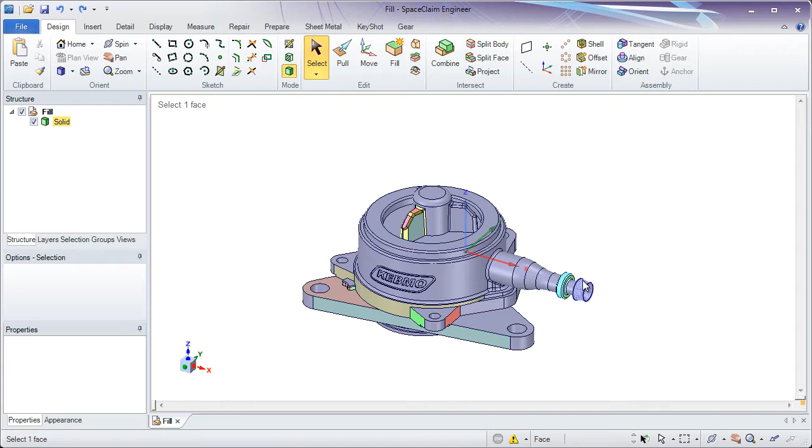Today we're going to be looking at how fill helps to remove geometry from a model. What it does is it removes the material that you have selected on the design. Let's zoom on to this piece here.

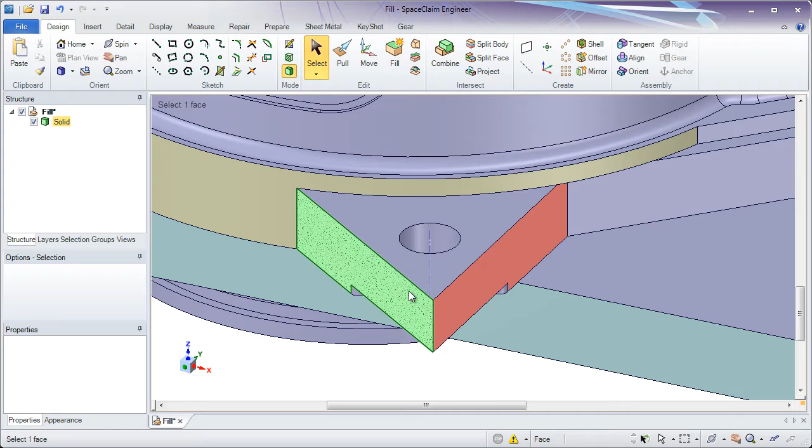You'll notice that what fill is meant to do is remove faces. Let's say I select on this round. If I click the fill tool, it removes what's selected, which is the round, and extends the remaining faces. So what I always think about is select what I want removed and don't select what I want to keep. Notice how the red face extends and the green face extends. This works for rounds, holes, and any faces that are on a part or a model.

Let's take a look at this hole for instance. Now, like we saw in Select and a few of the other tools so far, it's going to be important that we're selecting faces if we want to remove faces. Notice with this hole, if I select it and hit Fill, Fill removes that hole and extends the top face and the bottom face.

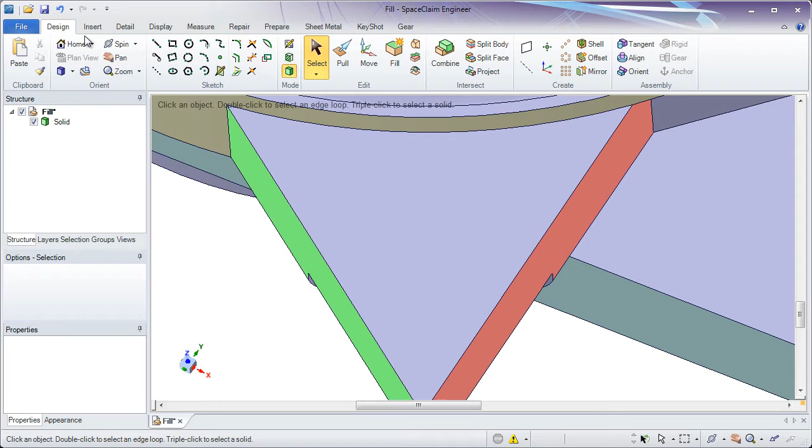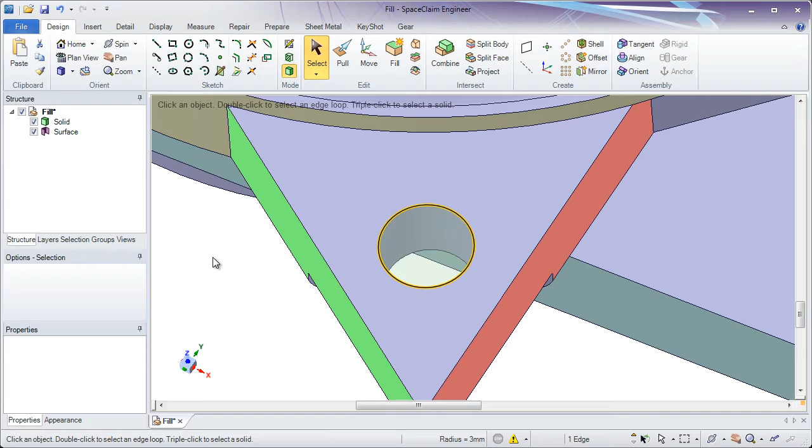If I undo, by hitting the Undo button in the Quick Access toolbar, let's say I select the edge of that. You'll notice if I click the Fill tool now, fill's not going to remove that hole, it's actually going to fill the area in between that edge and create a new surface. This is a nice technique if you wanted to change a through hole to a blind hole.

In this case we're going to undo, with Control Z or in the Quick Access toolbar, and we'll just click the hole and hit Fill to remove it.

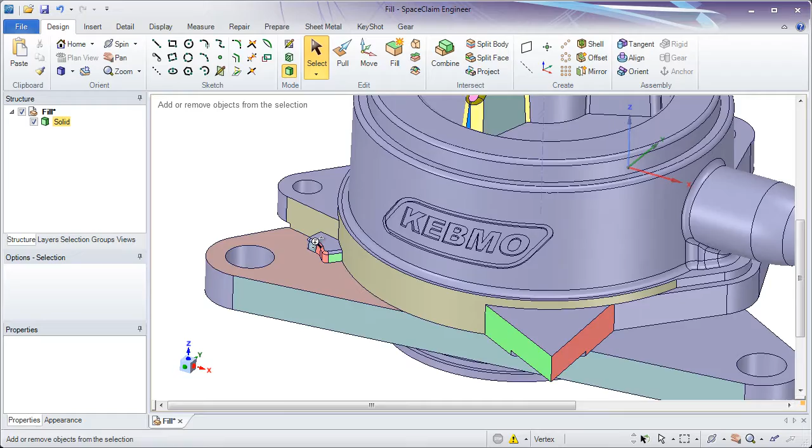Now, fill works with one face, but also with multiple faces selected at the same time. Let's zoom out and then zoom back in to the left side of the model. Remember, if you want to select chains of faces which are tangent, a fast way to do that is to double click. Notice this chamfer. If I double click, it selects that loop of faces. In the bottom right hand corner of my screen I have 7 faces selected.

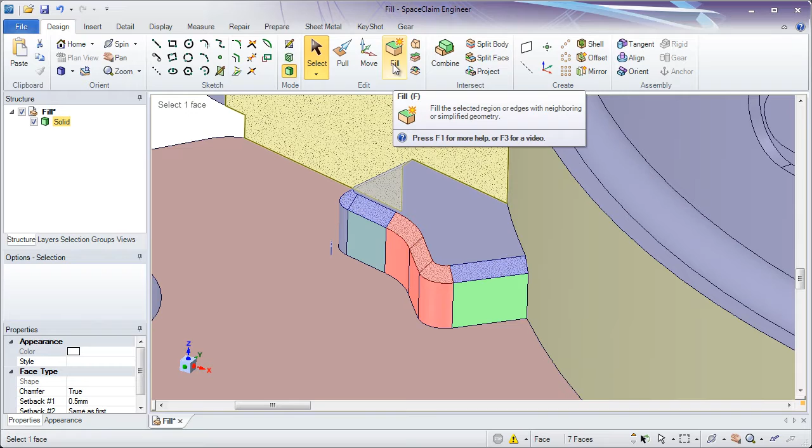With these faces selected, if I hit the fill tool, all of the faces selected are going to be removed, and the remaining faces are going to be kept. Notice the green face extends to the top, the red faces extend to the top, the blue face extends to the top. So whether you have one face selected or multiple faces selected, it will try to remove those faces and extend the remaining faces.

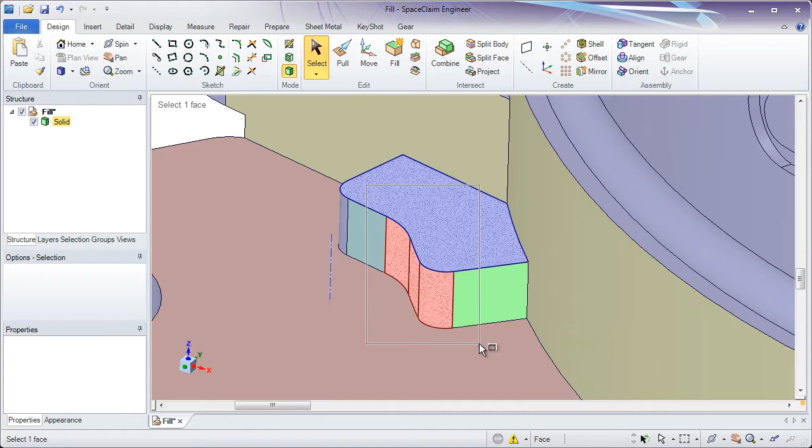Same way if I box select these red faces. Notice based on the angle of the green face and the blue face, when I hit Fill to remove these, it extends these faces until they create this new corner. It's always going to be important to imagine how the geometry is going to be removed when you hit Fill.

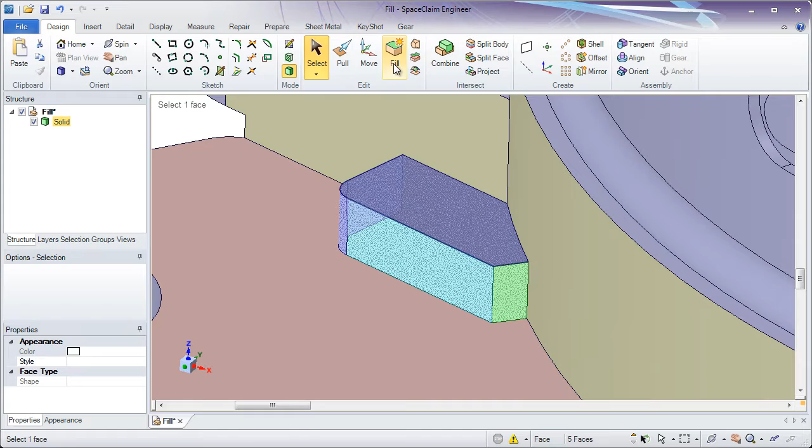For example, if I box select this remaining section, what do you think it's going to look like when I hit the Fill tool? If you can imagine that in your mind, there's a good chance it's going to happen. This face extends down, this extends down, this extends in, and it's going to remove that section and create these new edges and these corners here.

I'm going to zoom out and look at one more example on the right side of the model before we continue. Let's take a look at this section here. Let's say I box select the end of this. I want to get rid of this part of the model and remove it, and just have these faces extend together. You'll notice if I click the Fill tool now, it only removed the rounds.

If I click the Fill tool again, it's highlighted in red. In the bottom of my screen, it's giving me a message saying it's failed to remove these faces.

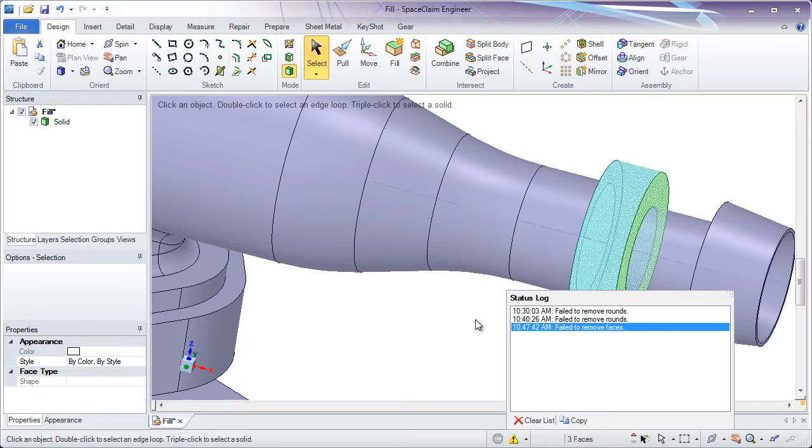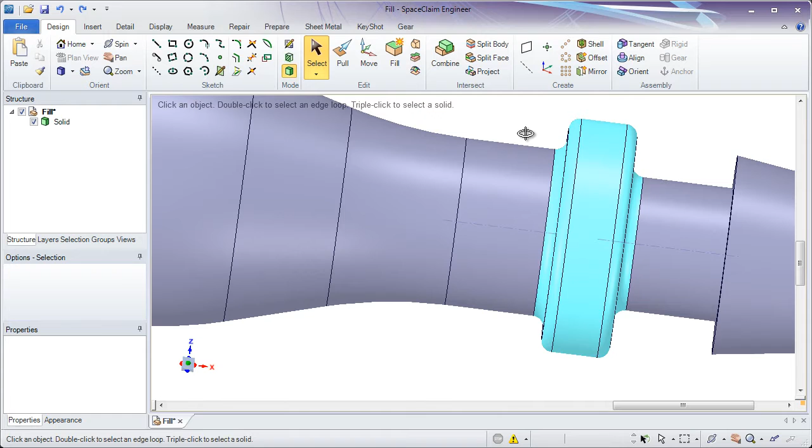Let's undo and take a look at why this might have been happening. You'll notice what I select attempts to be removed, so I'm attempting to remove all of these faces on the model, and whatever is not selected, it tries to keep. So if I go to a side view, what's happening is it's trying to extend this face into this one. If you extend these indefinitely, they will never hit each other. That's why the fill operation is failing.

So in order to give SpaceClaim some information on where it should stop extending, oftentimes I'll control unselect a face. By control selecting that green face, I've removed it from my selection. So now this cylindrical face extends to the green, and this cylindrical face extends to the green.

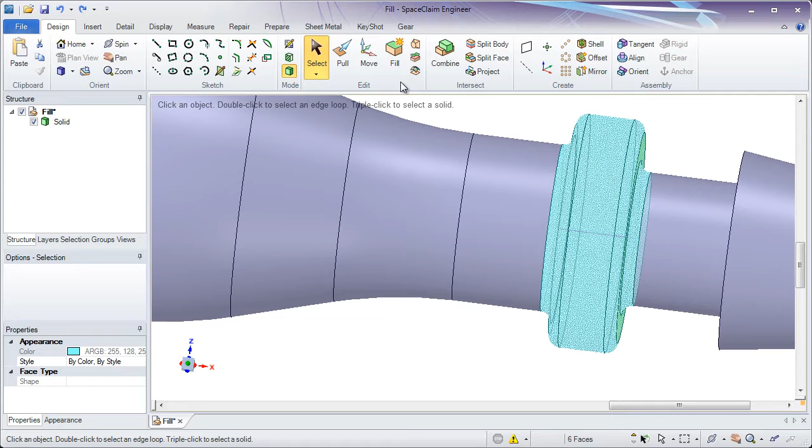So now when I hit the fill tool, it knows to extend it to this face, extend it to this face. So again, it's always important to think about how those faces are extending to remove the geometry you have selected.

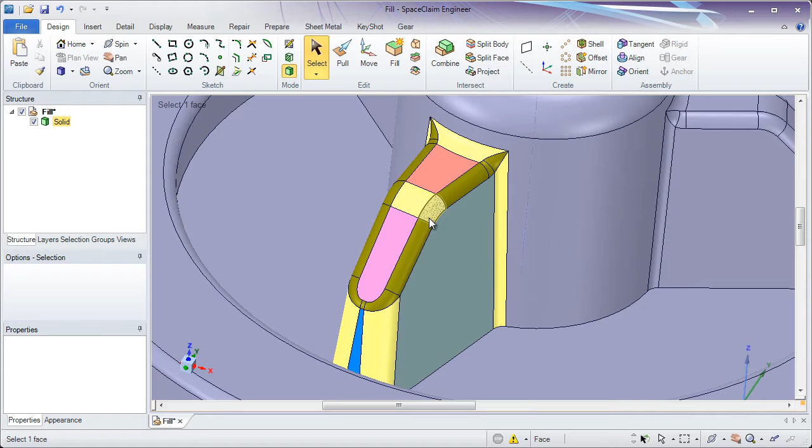Let's take a look at another example on the top of the model. Here you'll notice I have a lot of rounds and faces selected and highlighted on this rib. Now, one thing I always mention with rounds is that you can select a round, hit fill, and oftentimes we'll attempt to remove just that face of the round.

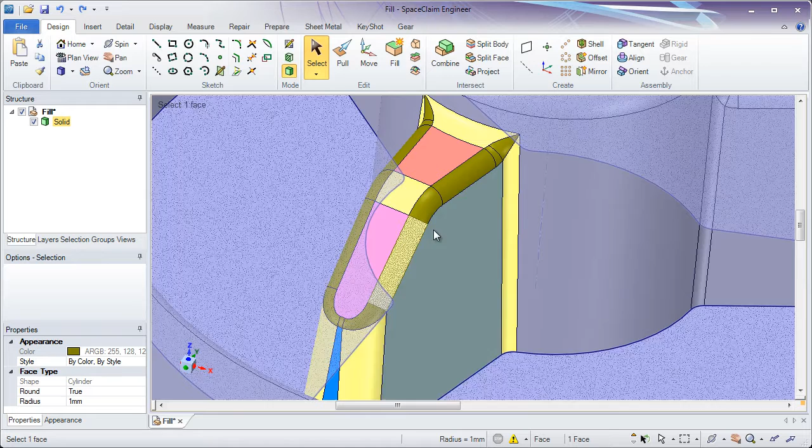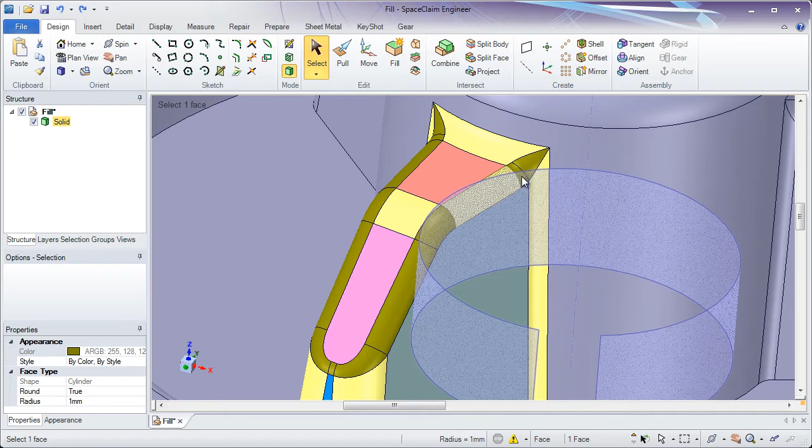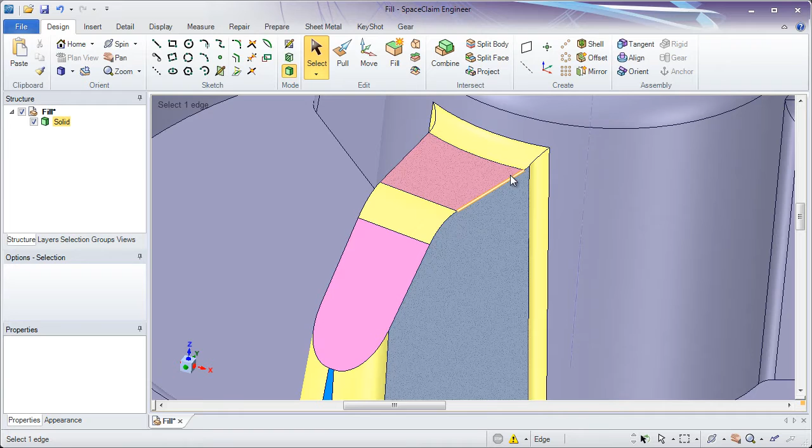The best way to remove rounds is to remove them in the opposite order they're applied. By simply double-clicking a round, you can get that chain of rounds that are there to let you fill them in and remove them at the same time. Now you'll notice this is a lot simpler to think about and look at. I could control select rounds to now remove them and get rid of them on the design.

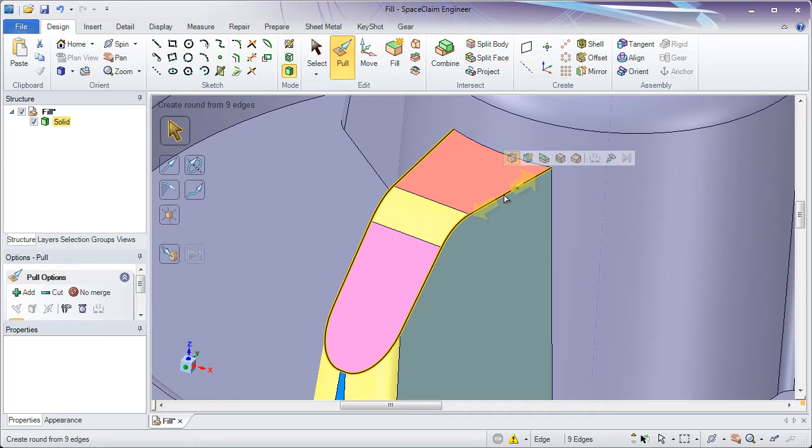And as you remember with the tools we looked at earlier with pull, if I do want to add these rounds back in, pull would let me do that. I could double click to grab the edge, type in a value of 1 millimeter, double click an edge, type in a value of 1 millimeter. So you'll notice how you can easily remove rounds and put them back if needed.

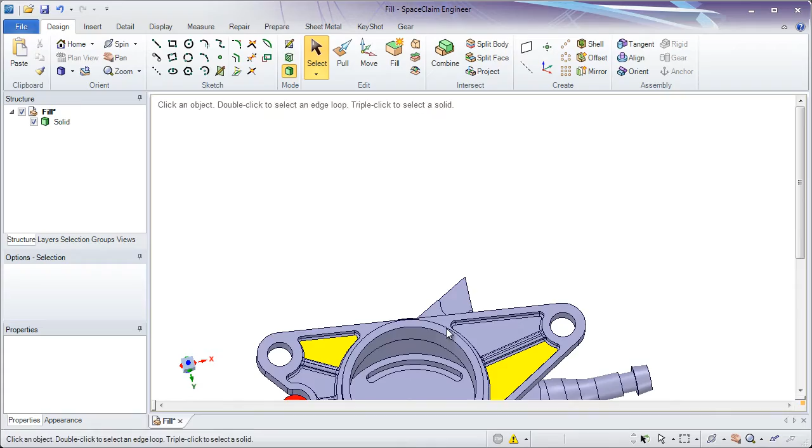Let's look at one more example on the bottom of the part. I'm going to rotate the model all the way to the bottom so we see 2 big yellow faces. I'm going to double click on this face in the top right. Notice once I've double clicked on that, I have 77 faces selected. That probably seems like a lot. I'm going to hit the fill tool and they're all easily removed. Why do you think that is?

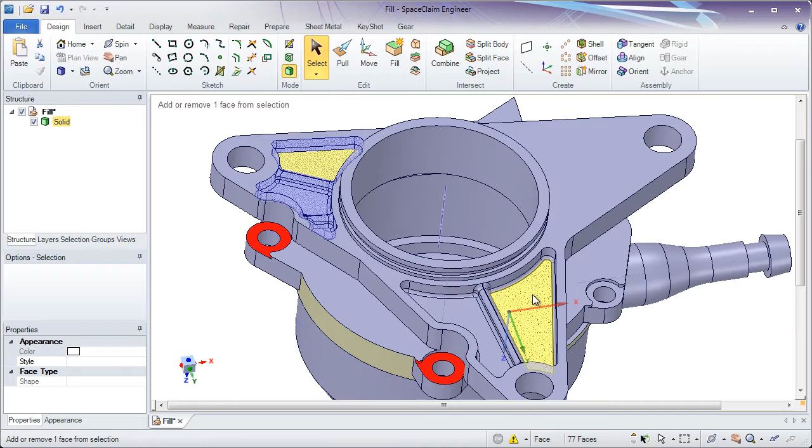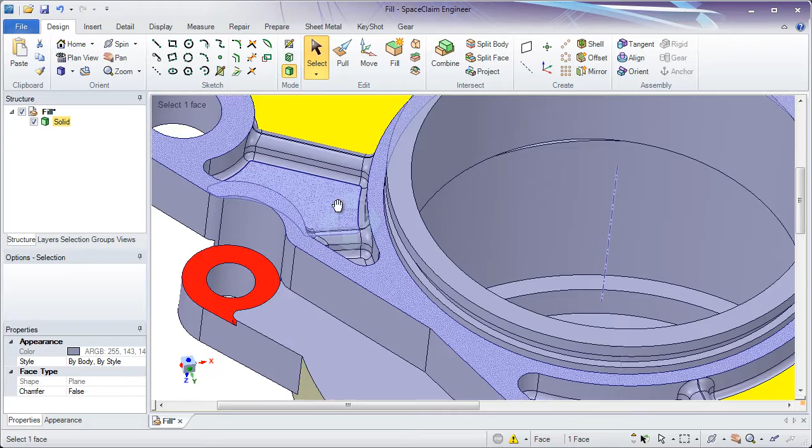I'll double click on this yellow face and control double click on this one. Now I have 128 faces selected. This is going to be a very, very simple fill operation. The reason for this is because it's removing all of these faces instantly and simply extending this top face on the model to close this area. Again, simply extending this top face to remove this area.

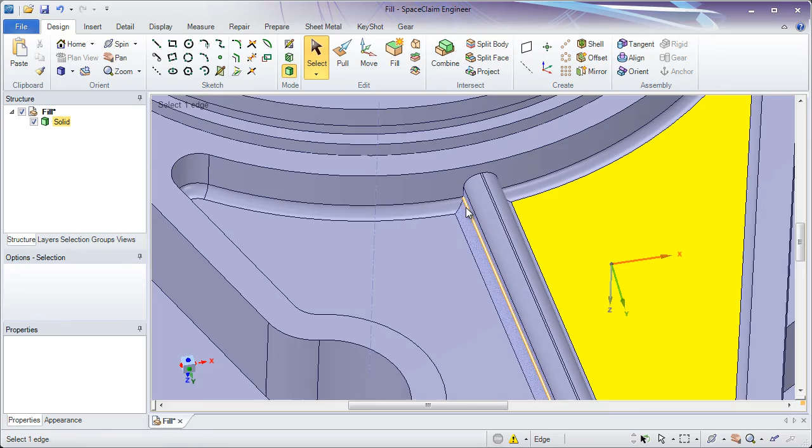A much more complicated fill operation would be to box select just a few of these rounds and hit fill to remove them. In this case, it's making brand new edges and extending a lot more faces. So again, what's complicated in a fill is what's extending to remove those faces. So again, we'll double click the 2 yellow faces and hit fill to remove them.

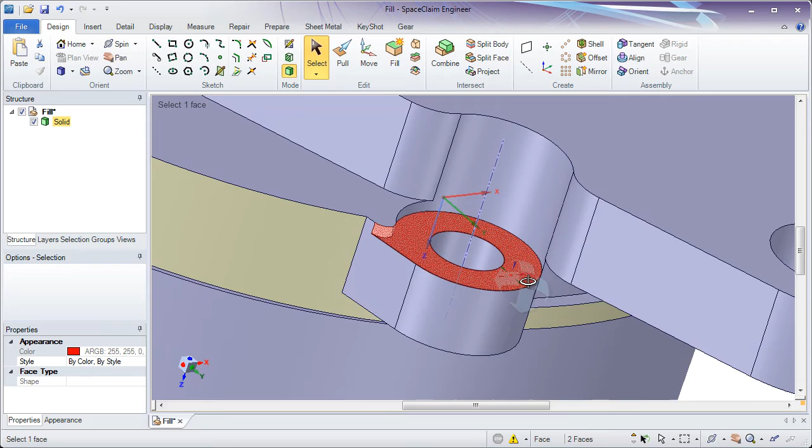Now the last example I want to show you are these red faces here. Let's say we wanted to remove this little small inlet here. You'll notice we box select them. We have the red faces selected. But now how is this going to extend to remove them? This face, I guess, will extend here and here to form a sharp edge. But this face will never extend up to this one. How is it supposed to know whether to extend this and to clip these faces here?

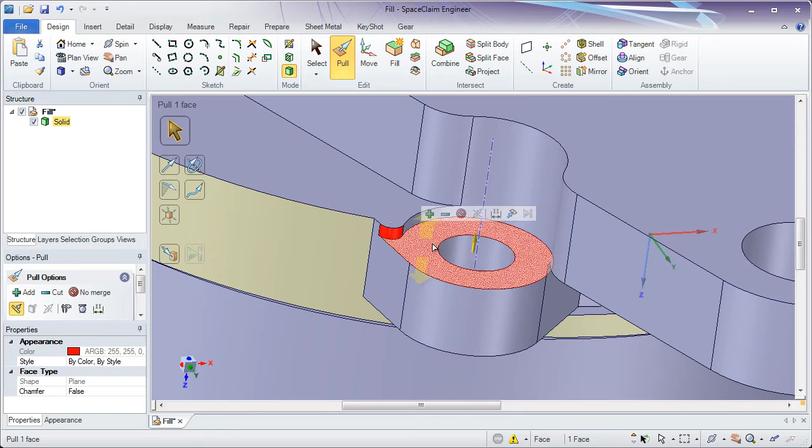The important thing to remember when thinking about how you want to remove geometry is that you don't always have to use the fill tool. For example, to remove this little drop of this inlet here, it's really easy to not use fill, but to use pull. Simply select the face and pull it up to our face here, quickly removing that area without having to think about what faces should be kept and which faces should be removed.

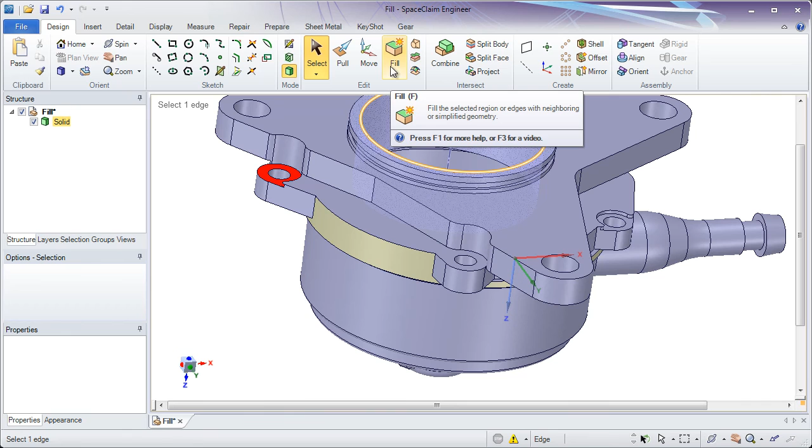So remember, there's a whole suite of tools for removing geometry, and what fill does is simply extend the faces which are not selected and remove the faces which are selected. Thank you for watching our section on fill.